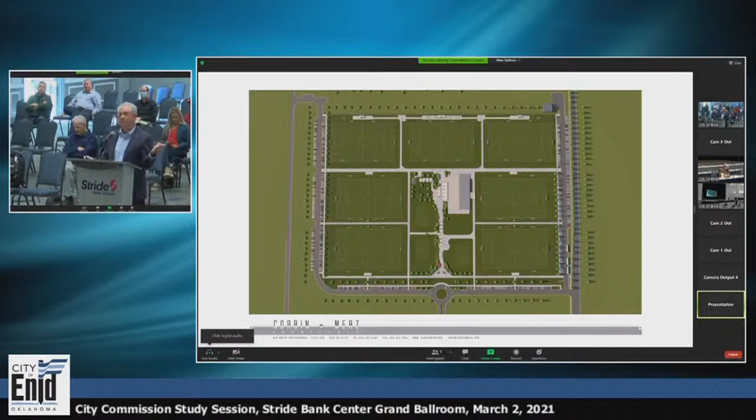When coming up the center sidewalk, on either side, the left or right, at the very front will be small practice fields. Then as you pass the first sidewalk step, that little curvy area is a water feature area. Past that, to the right is a green space, which could be picnic or lawn area. To the left is the third practice space. Then as you get towards the clubhouse, on one side is a playground that would be fenced and enclosed, and to the right would be the clubhouse.

Landscaping budget and the architectural features are all a product of the budget, which then becomes part of the fundraising. And that's still a little fluid right now. But this is the direction we would like to go. This is a shot of the main walkway going towards the clubhouse. And this is an older drawing that has the advanced soccer complex on the side.

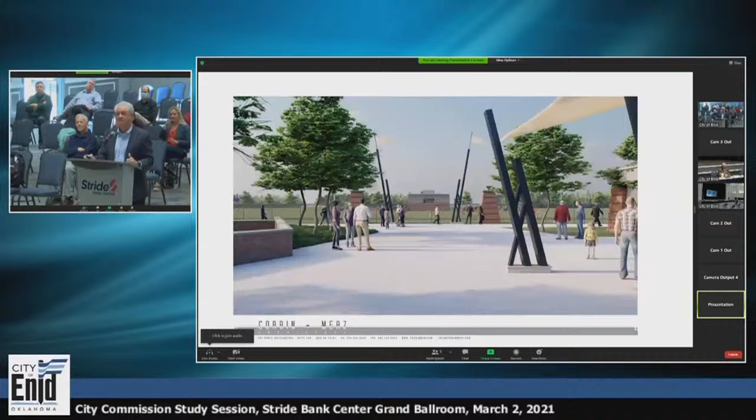So to orient you, this is north-south. So north is going straight up, south is coming straight down. And there is—I'm going to turn back just because I want you to. So that main sidewalk where the entry is from the roundabout, you have some brick walls and entry, much like the David Allen ballpark that you enter through. And then you go up that sidewalk to the clubhouse, and actually you make a right-hand turn to get into the clubhouse.

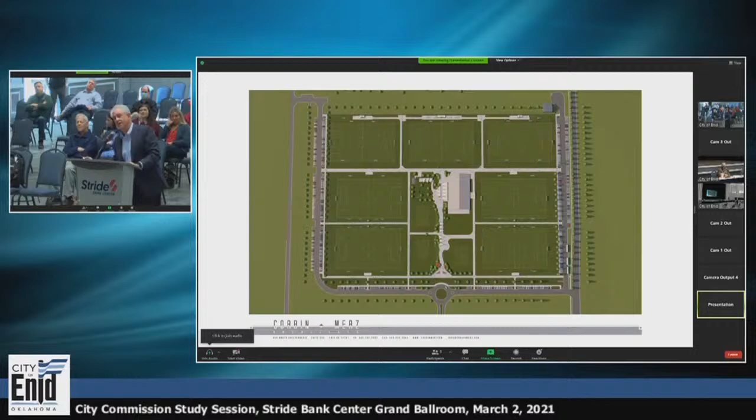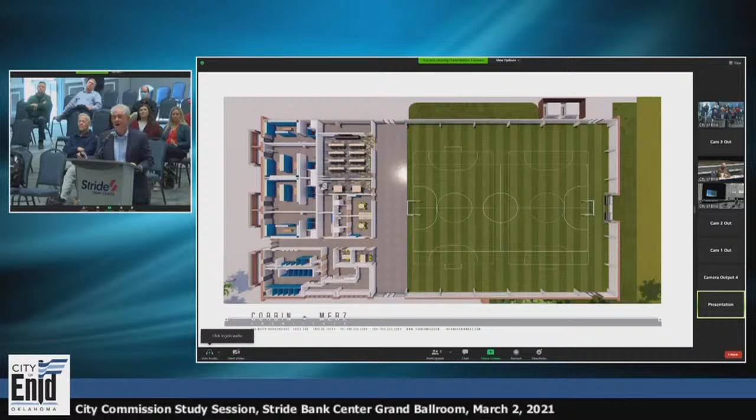So now let me advance back to this slide right here. That right-hand turn is there at the bottom of your screen in the middle. So that's a covered entry—let's call it glass doors. And that is a north-south hallway that would go all the way from the middle to the north side of the field.

Obviously, if you keep walking past, you end up at the championship field there at the north. The indoor—this is one structure under one roof. So to the right is the all-purpose futsal 5-on-5 soccer complex.

Again, the materials used for that, we could do any indoor type of event. It's a very, very flexible surface. There might be a net or something that would allow people to view into the court, but obviously serve as a buffer or a wall. It might be a net that goes across.

And there to the left, so now moving to the west, is really the clubhouse area. I'm going to start from the bottom and work my way up. So the bottom—there's the center walkway. So now moving west, at the very bottom is the concession, an L-shaped concession area. And right going north of that is a corner office, which will be the information area, the check-in area.

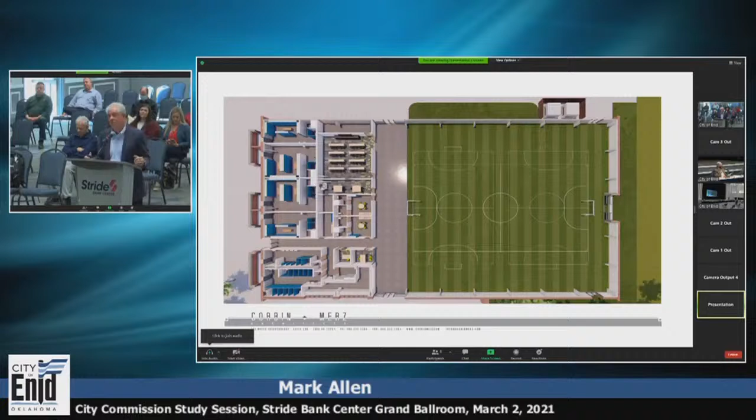We've spent several months with a lot of people in Enid who have been to other tournaments. We've viewed other facilities, gotten a lot of great input from Rennie Turner, who's from Baltimore, Maryland, who has done 20-plus facilities now. We think we've checked all the boxes here.

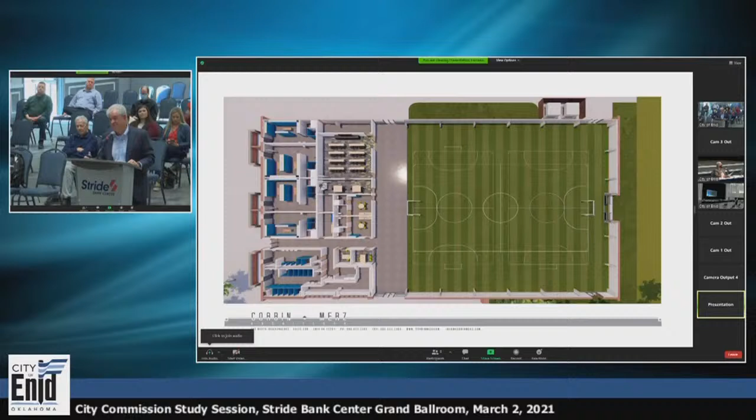We're also going to build this in such a way that the roof will be load-bearing, so that we can add a second floor at a future time if the city desires. A lot of people, we got to that point because that was an initial ask, but we had to pull back a little bit. We're going to put in the structure and footing such that we can get to that point with an elevator and stairs if we want to. We're being told the view will be spectacular up there, and that may be something the city wants to consider down the road.

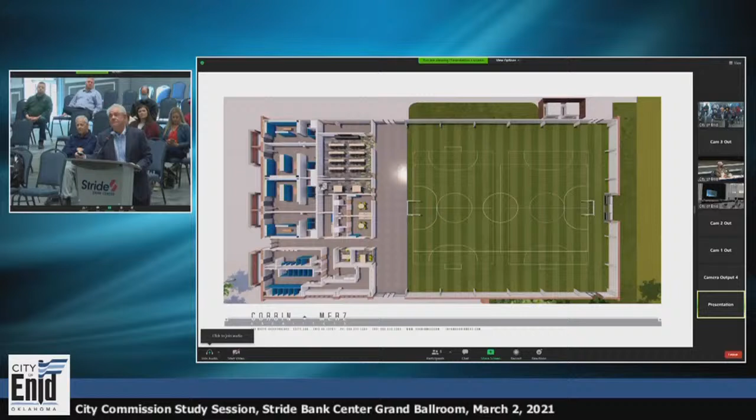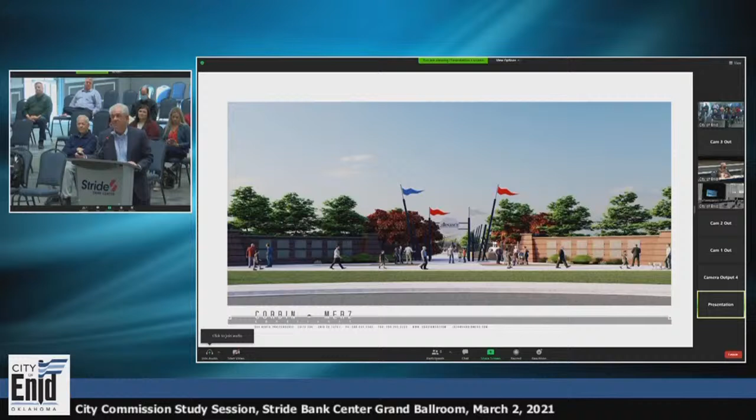The North Drive - there's the roundabout. Think about traffic flow, think about 1,500 fans on a weekend soccer tournament. Granted, this might happen 12 to 18 times a year, so it's not every day. But think about what's going to happen.

People are going to come off Garriott, go south on Garland, get in the decel lane, and turn in. You've got a roundabout here, and cars are going to pull in and park.

By the way, you're going to have about 25 buses of kids pulling in on the North Drive. You can see we've allowed drop-off and pickup spots for the buses on the north side. But obviously, the last thing we want is to cause traffic congestion with all these kids running around.

Ideally, a consideration is this: do we want to make this a one-way option? You come in, turn right, and have to keep going right. That means what's depicted as a gravel road and parking on the far west might require pavement.

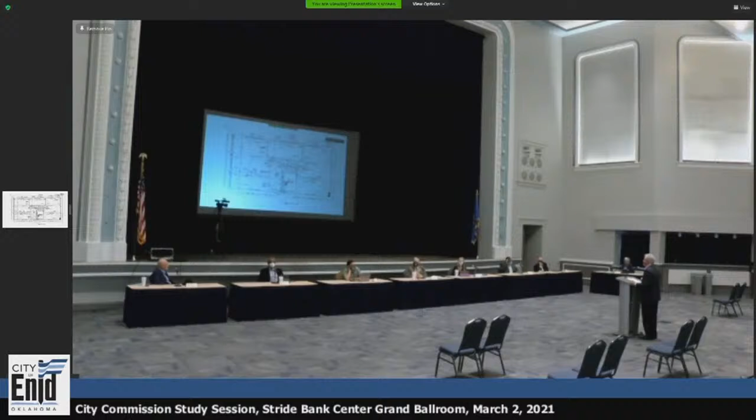So we want it to be very nice and warm as we can make it for our visitors to our community. Are you doing a tree line on any edge as a windbreak or anything to that effect? We actually had a tree line drawn between the parking lots, and there's another drawing that has it going all the way up east to west. Maybe not trees, but Burford hollies, bring in 6-footers, things that are really hardy and will stand the test of time and are evergreen. Those things can get 15, 20 feet tall, and you can't kill them. And they're real prickly on the end, so it's kind of not a bad security measure too. We do plan a 6-foot chain link fence around the perimeter with those gates that you see drawn in.

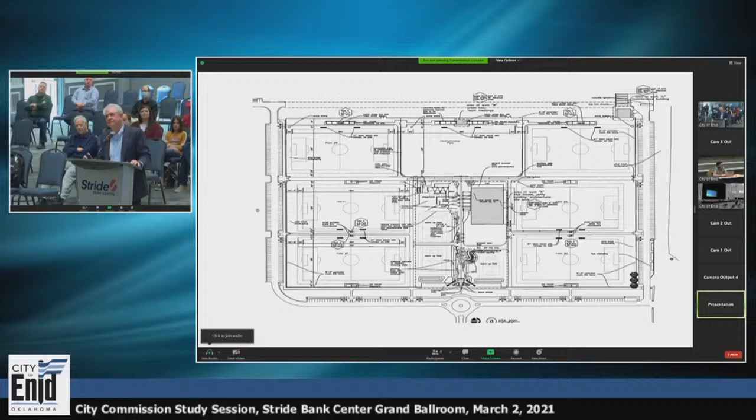We have a landscape architect, a good friend of mine in Tulsa, who's working on those particulars.

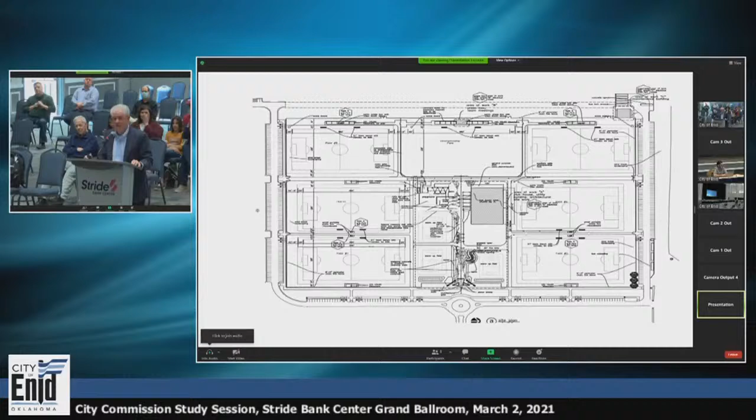That's great, Mark. I have to say, thank you to your family for changing the entire complexion of this community over the years. This addition to the ballpark is unbelievable for our town, and thank you so much. It's fantastic, it's beautiful, it's first class, like everything your family does. And you get a lot of accolades, but not enough, because this is just so exciting. I drive by this every day on my way to work, and it's been neat to watch it develop. I saw when the grass started growing out there last year when they put it in.

It's very exciting, yeah it really is. And the thing that I didn't understand is how important it is to treat this grass. There are a couple of things about this that I think are important for the city council to know: these fields are much like a golf course. You can't just run a regular mower out there and mow them every six days and be done. It requires a daily maintenance program, a lot of treatments, and special mowers and equipment to take care of it. So going back to the David Allen Ballpark model, it's a public-private partnership, where the city will own the assets and the facility, and Enid Sports Association, the nonprofit, will run the operation. Enid Sports Association will be responsible for the maintenance of the facility, with the city of Enid responsible for the utilities and other types of maintenance upkeep.

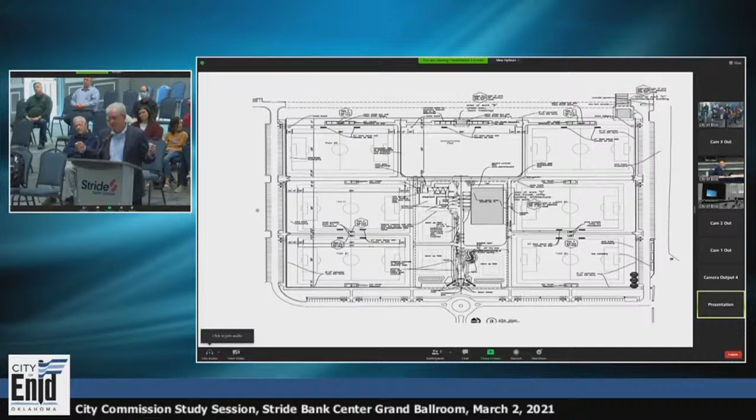I did neglect to talk about the lights, and I want to mention this before I finish. The lights are a very expensive proposition. We are putting in the transformers and all the wiring underneath to be able to light the entire complex. I think we want to do that at the end of the day. We haven't even drawn in lights for the parking lot, so again, just things to think about. But those lights are $1 million that you're looking at. And there's so much here that we're raising, so then you have to put priorities down. Right now, it could be that we only put lights on the championship field and none of the other lights exist. We wait for a donor or some other funding in order to put those lights in place. I don't know, I'm just giving you kind of where we are at this point in time.

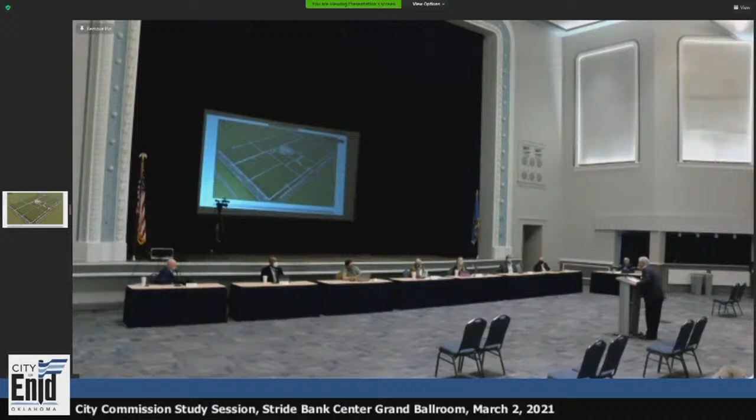Has OG&E contributed at all to that part of it? Has OG&E contributed at all to the project? No, OG&E has not contributed anything to the facility.

I don't know that we've actually asked either. I know they participated in other projects with lighting and with some of that cost. Mike Stanky and Nicole Winfield are heading up those sort of fundraising projects.

I saw Mike here earlier. Yeah, see, he's gotten tired of me talking. I talked all noon. So anyway...

They have been going to a lot of the businesses here around town, commercial, Lowe's, I know is a big one that they've been talking to, and I'll remind them to go talk to OG&E. They've been a good community partner with some of these projects in the past. They've definitely been out on site, they know what's going on.

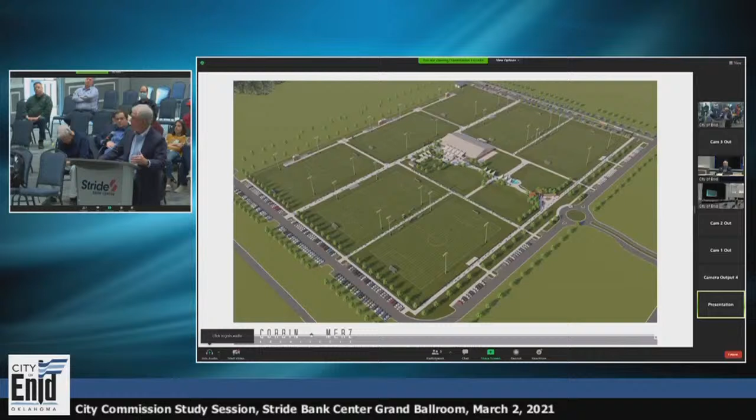So there are really no other phases other than a general expansion to the west, which I've talked to Greg Schamberg about at the YMCA, about this facility being an extension with the YMCA, and the YMCA possibly needing some other assets to run programs. That would be a second story on the clubhouse, could be a second phase. But for the most part, we're good to go here.

Yeah, Jerry. Oh, I thought you... We're going to have plenty of water for you. They'll have plenty of water for you. Water? Yeah, you're going to need it for those fields. Well, yeah, we are. Like I said, you ought to go out there and walk it sometime. You can put 5 baseball stadiums in that thing, I think.

So, Mark, you and the McLaughlin family have some excellent experience with soccer, particularly in the Oklahoma City area. Do you have another facility or organization that you've used as kind of a model for operating, for setting priorities on who uses what when, for the logistics of just the operations through the course of the year?

Yeah, Jeff, as you know, on the baseball field, we've had to deal with that issue a little bit in terms of not so much community, but different conflicts like the Oklahoma State baseball championships in one year, things like that. I think this is going to be a lot more challenging. Seth Jenkins is heading up the operational committee here in Enid, and he has many members of the Enid community on his team.

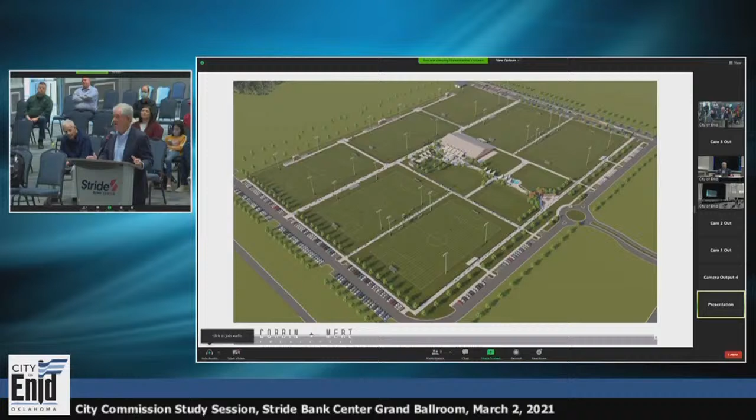I mean, there are other questions. Gate control - if we're going to charge to come in here, how are we going to charge? You've got to have multiple entrances, so there are still some questions that I think we'll need to vet out. But I can promise you this, that the Allens will not lose sight of the three reasons we're doing this project: civic pride for Enid, youth development and a safe place for youth to be, and economic driver for the city of Enid.

Thank you, Mark. I really admire the approach and the methodical process you've gone through to do this, and the incredible donation that your families have made, and then being a catalyst for this being a first-class community facility that I think will carry out those missions that you described. Bless you for doing this.

Well, we're excited to do it. Again, as you've heard my dad say over and over in many forums here in Enid, we couldn't have done Advance Food Company without the city of Enid and the community of Enid. And we feel like the least we can do is say thank you. So we're proud to do it.

Also, thank you for the work you did on the east side of town with the soccer field at Longfellow. I'm really deeply thrilled to see that. It's getting used all the time. I drive past it 3 or 4 times a day, and it's a huge improvement to my neck of the woods, and I really appreciate it.

Yeah, we were really happy to do that, because it was necessary and needed. Yes. Well, good. I'm glad that you see that it's working out well.

Anybody else have any questions or comments? Okay, thank you, sir.